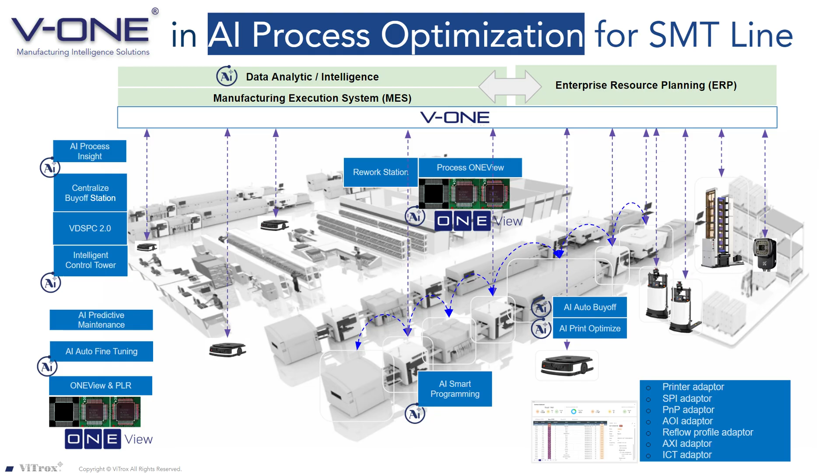So V-ONE is essentially acting like a virtual consultant, analyzing your production process and suggesting ways to make it more efficient. That's a great way to put it. And one of the most powerful tools in V-ONE's arsenal is Control Tower. It allows for remote fine tuning of your machines without having to stop the entire production line. I can see how that would be a huge time saver.

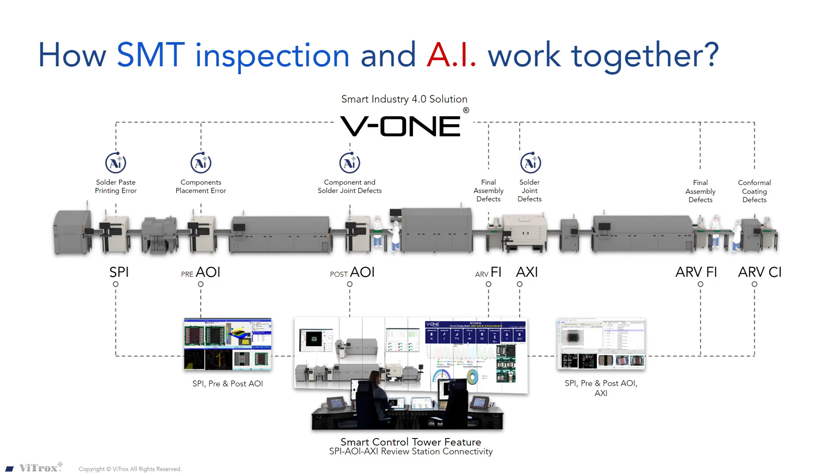But for someone who might not be familiar with SMT lines and control towers, could you break it down a bit further? Sure. What does that look like in practice? Imagine you're running a production line and you notice that one machine is consistently causing a slight delay.

With Control Tower, you can access that machine remotely, adjust its parameters, and optimize its performance without ever having to physically stop the line. This minimizes downtime and keeps everything running smoothly.

So it's about making those micro adjustments in real time to keep the entire system operating at peak efficiency. Exactly. And Control Tower doesn't just make changes blindly, it actually calculates the impact of those adjustments before they're implemented, so you can be sure they're going to have the desired effect. That's really smart. It takes the guesswork out of optimization and makes the whole process much more data driven.

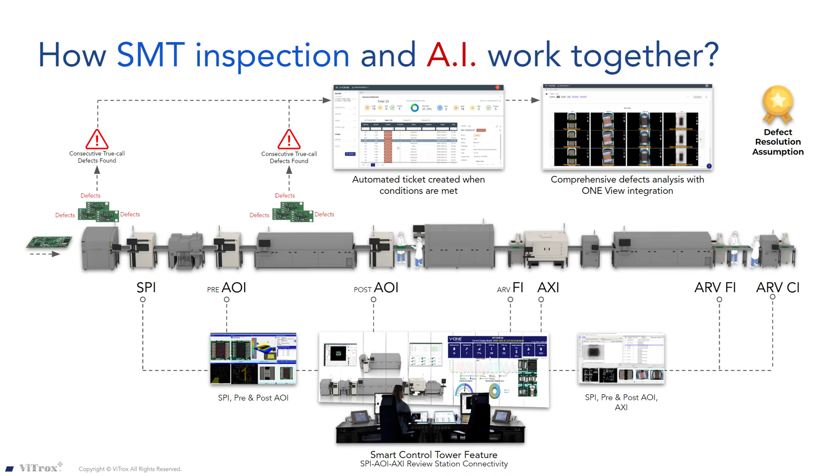And that's a key theme we're seeing across the board with V-ONE: the fusion of human expertise with the analytical power of AI. So it's not about replacing human operators, it's about giving them better tools and information to make smarter decisions.

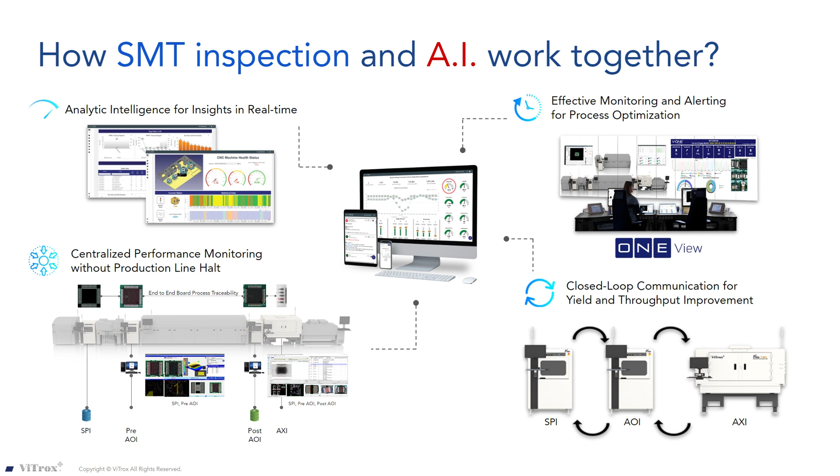Precisely. And speaking of smarter tools, let's talk about something really exciting that's coming soon in V-ONE version 5: chatbot support. I've been curious about this. It's a game changer for maintenance, troubleshooting, and documentation.

V-ONE will be using a technology called retrieval augmented generation, or RAG, to provide chatbot support that can answer your questions, guide you through procedures, and even help you find specific information in those dense user manuals. So instead of digging through pages and pages of documentation, you can simply ask the chatbot a question in plain English, and it'll pull up the relevant information.

Exactly. Think of it as having an expert on call 24/7, ready to answer your questions and guide you through any challenges you might encounter. That's amazing. It could save so much time and frustration, especially when dealing with complex machinery and technical documentation. Absolutely. And this kind of chatbot support is just the beginning.

As AI continues to evolve, we can expect to see even more innovative applications emerge in the world of manufacturing. Really an exciting time to be in this industry, with so much potential for increased efficiency, improved quality, and ultimately a more streamlined and productive manufacturing process. I couldn't agree more. It's a fascinating field to watch, and I'm eager to see how these technologies continue to shape the future of manufacturing.

Before we move on to part two of this deep dive, I'd like to know if there's anything in this section that you'd like to go back over, or if anything is unclear. I think we covered it pretty well. Okay, good, everything seems pretty clear to me.

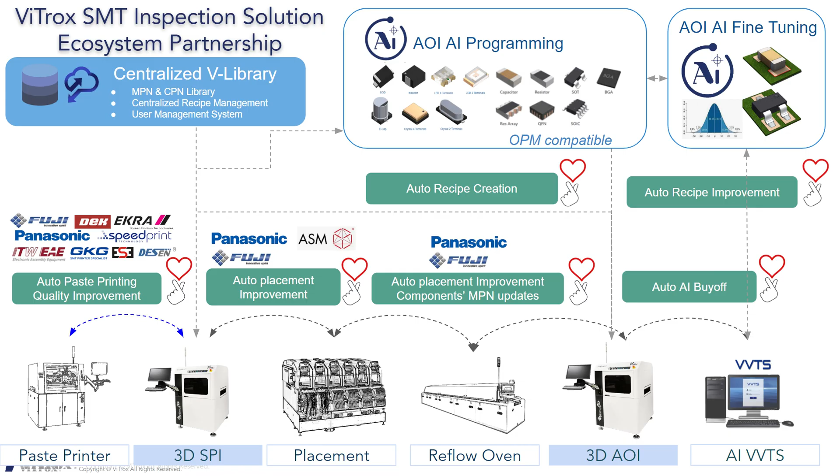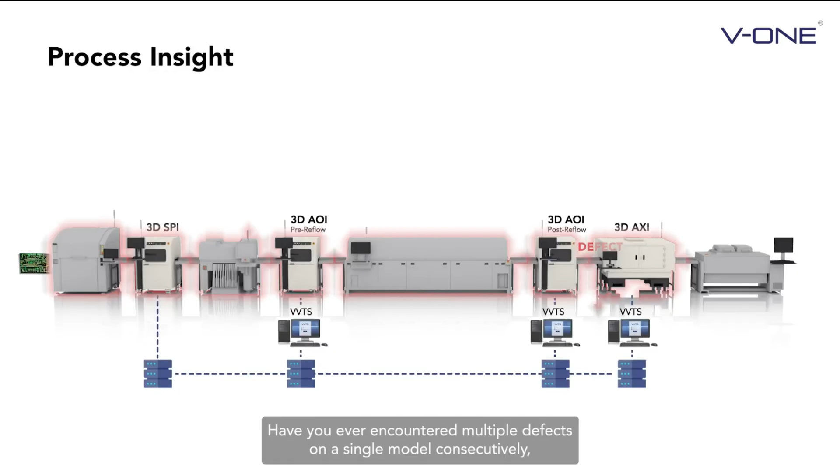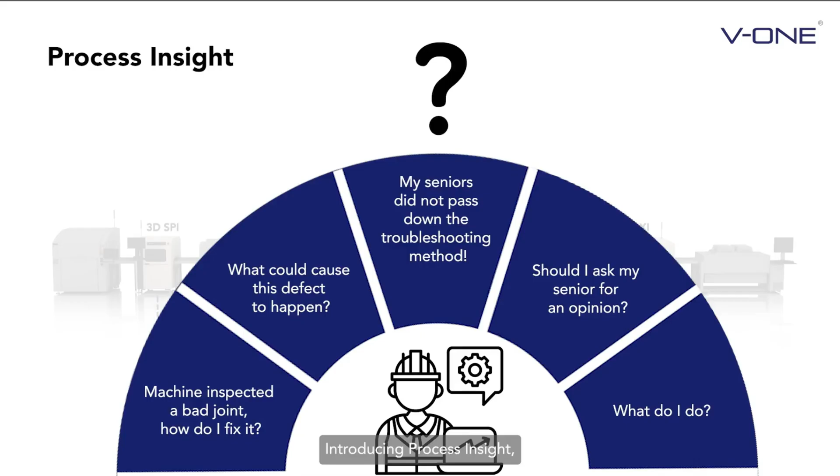Have you ever encountered multiple defects on a single model consecutively without being attended by any operators on the production floor? And as a junior engineer, you thought, what should I do? Introducing Process Insight, a new module within V-ONE software that offers immense capabilities and potential.

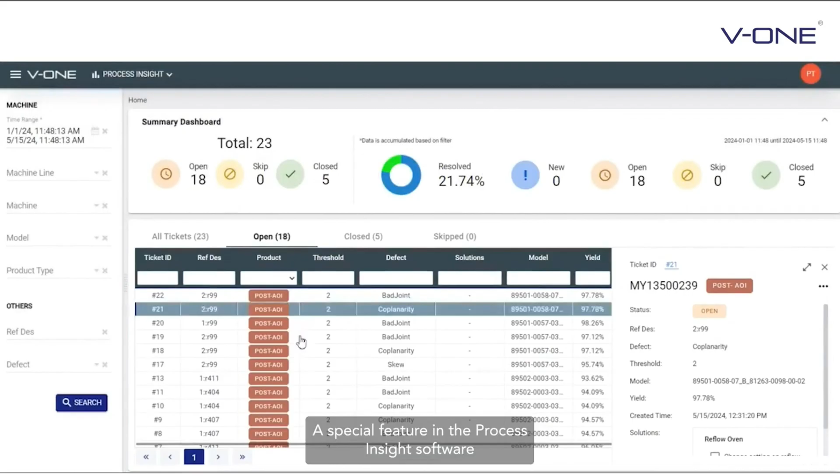From the panel summary, you can see multiple defects have been recorded and left unattended. Once the system takes note of the consecutive defects, it will open a ticket. A special feature in the Process Insight software will alert the engineer through a notification. The operator can then acknowledge the defect by opening the ticket to view the issue.

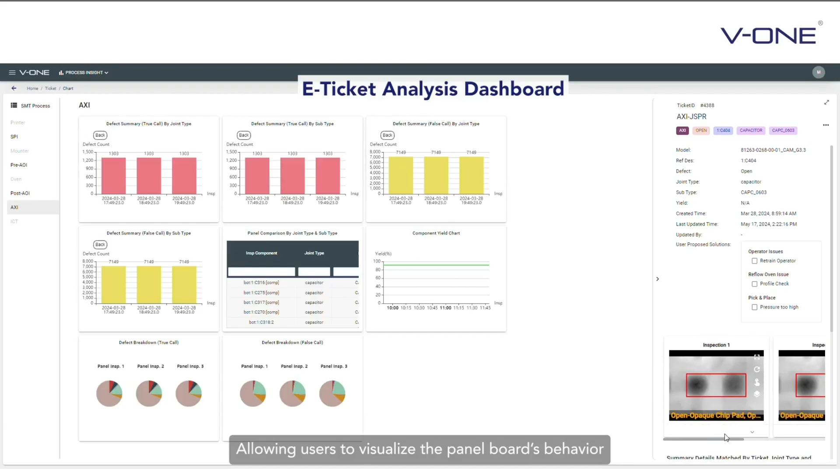Inside the ticket, the software offers a detailed description of the component reference designator and defect images from the SPI, AOI, and AXI. Additionally, Process Insight's one-page dashboard displays the latest defect panel results, allowing users to visualize the panel board's behavior and determine how to improve their production process.

An added benefit for junior engineers is the assumption solution box. Juniors can select solution templates that fit the defects detected by the system. The key values offered by Process Insight are real-time defect detection, auto-ticketing triggered when defect conditions are met, thorough production overview, and comprehensive defect root cause assumption analysis.

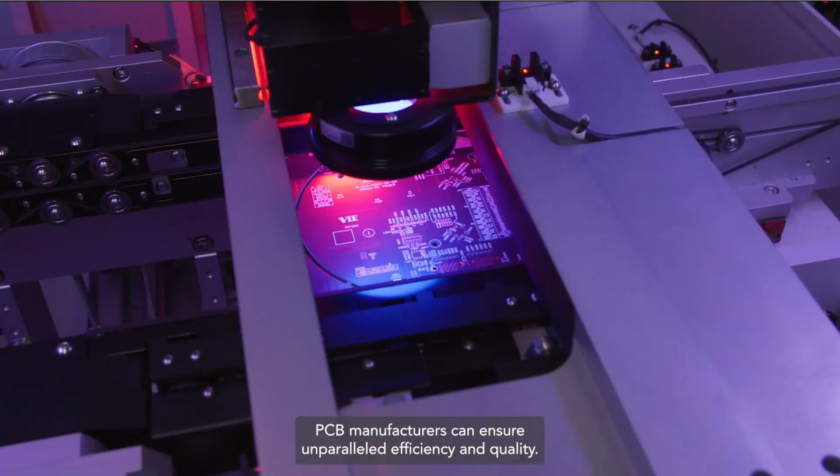With ViTrox's Process Insight, PCB manufacturers can ensure unparalleled efficiency and quality. For further inquiries, you may reach out to the V-ONE Business Development Team.